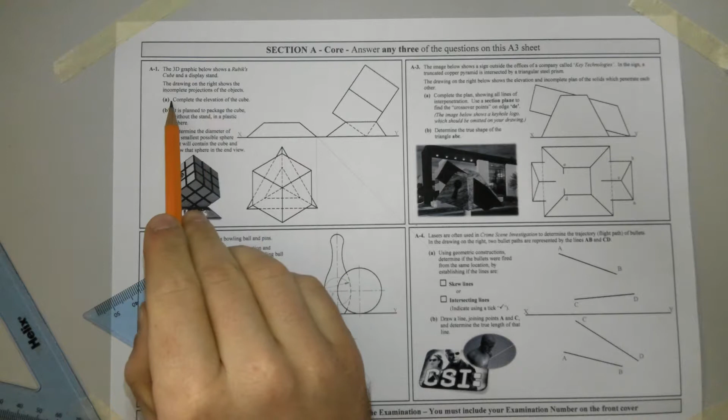So the purpose of this video is to show you how to do 2013 section A, question A1. The 3D graphic below shows the Rubik's Cube and display stand. The drawing on the right shows the incomplete projections of the objects. Part A, complete the elevation. So we've got a plan and end elevation.

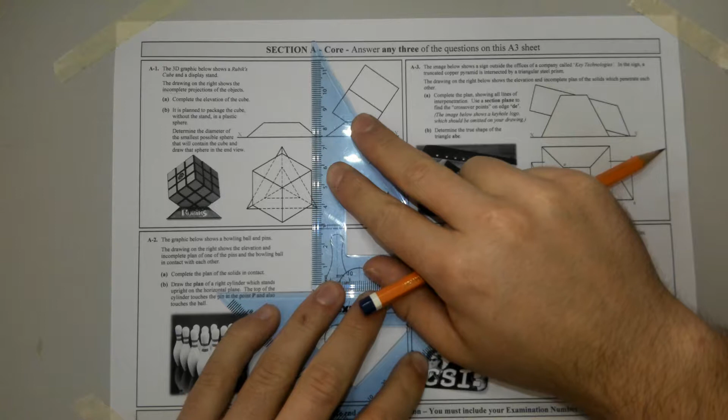Alright, so to start off, project all your lines from plan straight up, and all your lines from end elevation straight across. So we can do that now. So them all brought straight up from plan. Now I bring all the points from end elevation straight across.

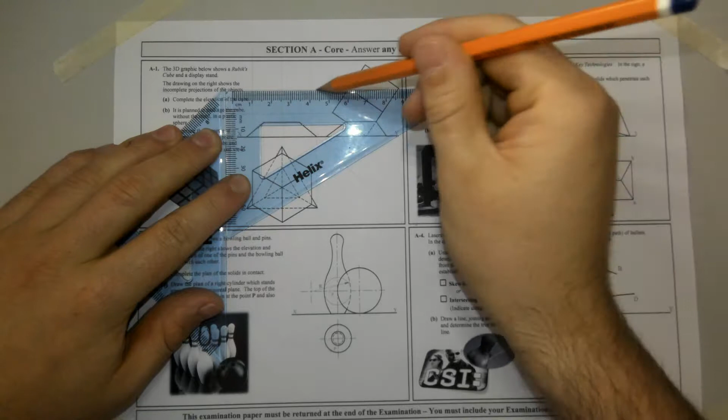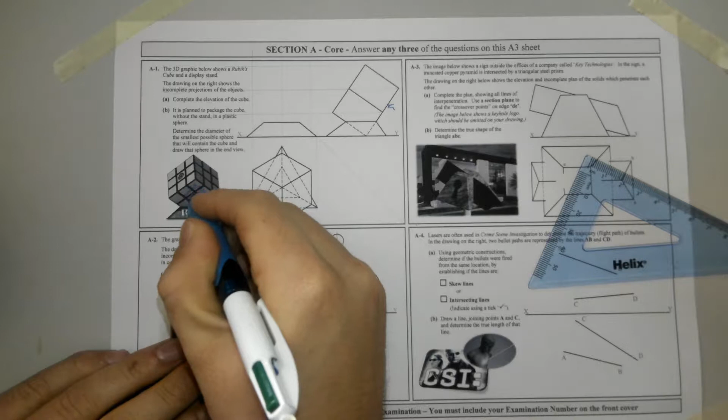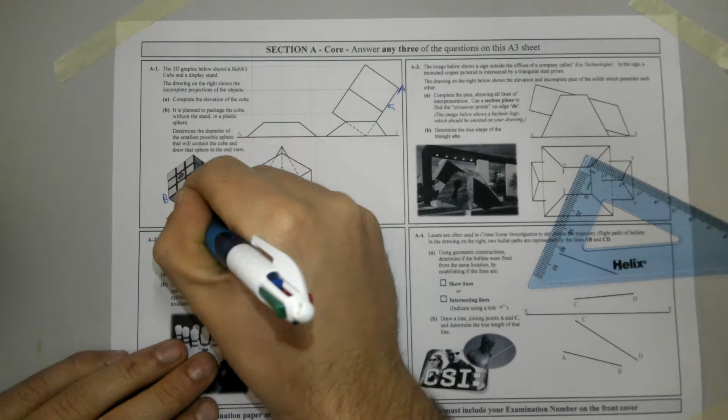Okay, so that's done. Now it's about figuring out which ones are which. So I'd use this 3D graphic to help me. That bottom face there that I hashed in blue is this bottom face here. So I'm going to call this A, D. So when you're looking in there from the left, you project it on the right, so this is the end elevation, so B, C, D.

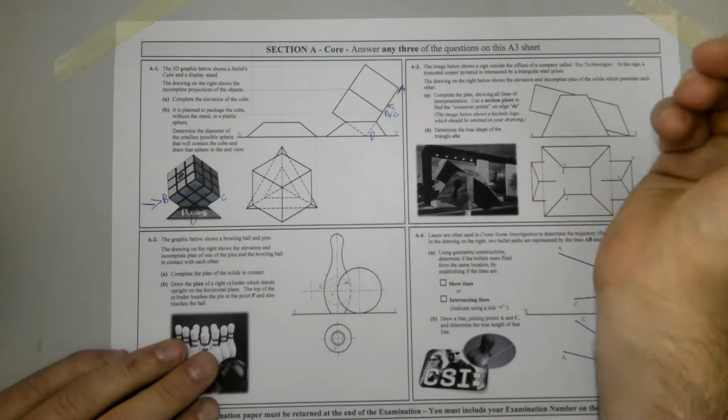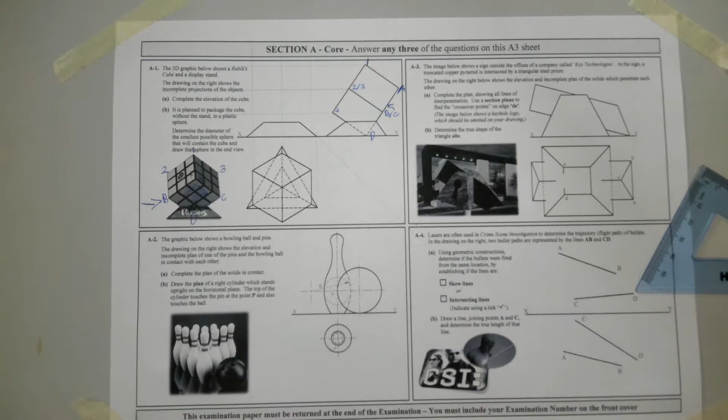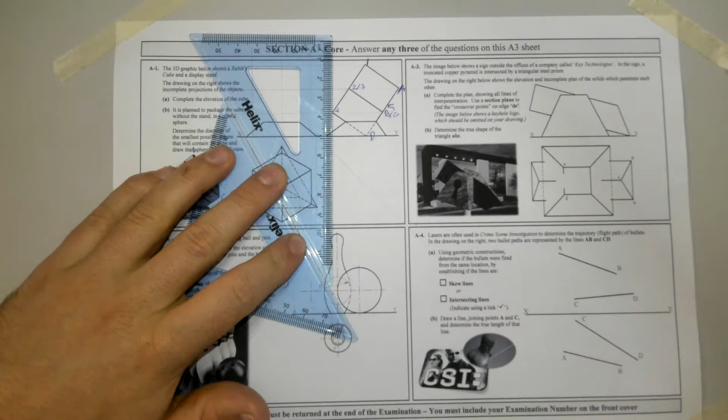And then I'm going to give these numbers 1, 2, 3 and 4. So this is 1, 2, 3 and 4. So where they are in plan view is the question. So we can drop these points down to our 45-degree line, and we can bring them across to help locate them in plan view, so we can have an idea as to where they're going to be in elevation. Right, 1 and D will be exactly in line.

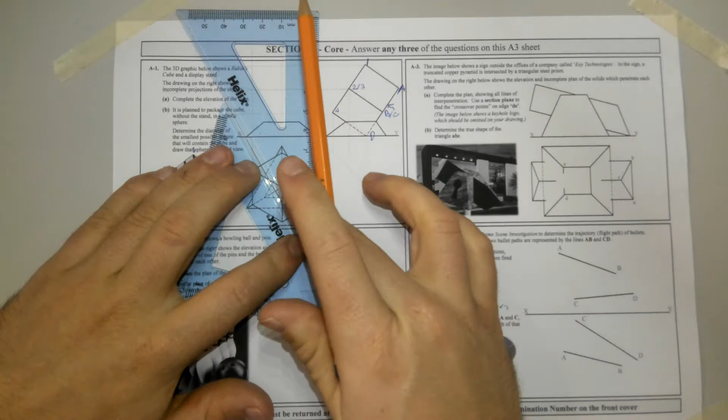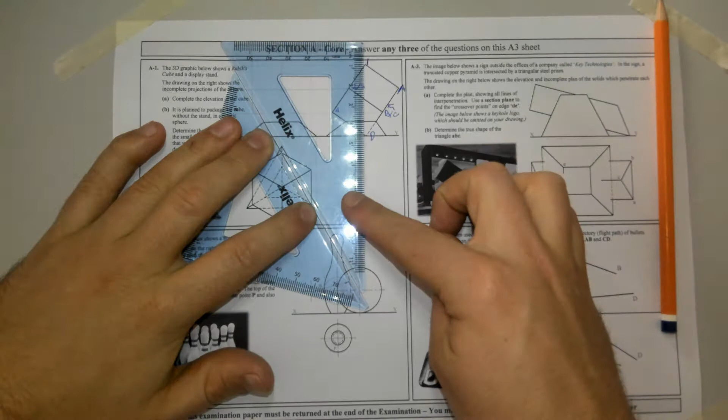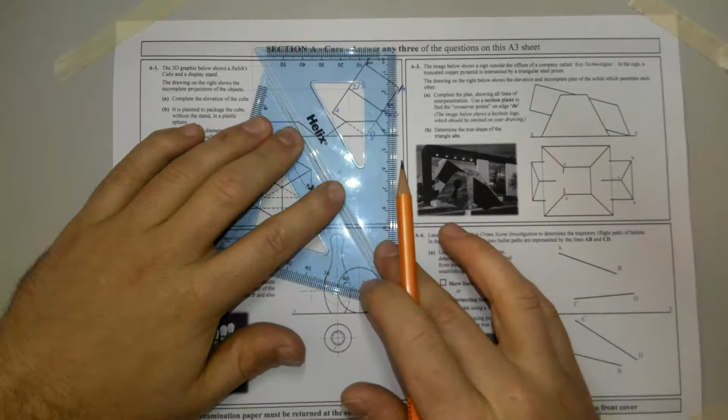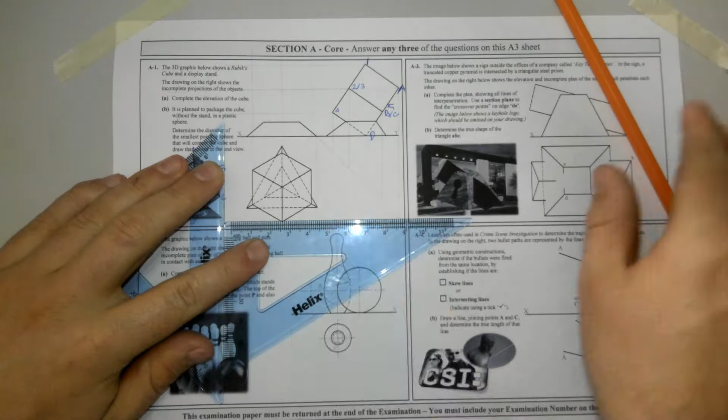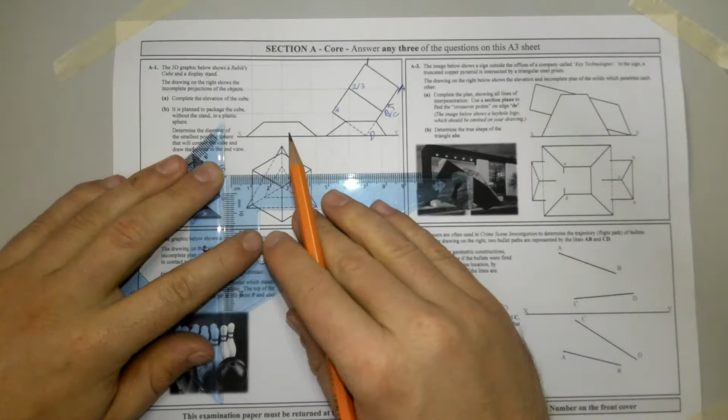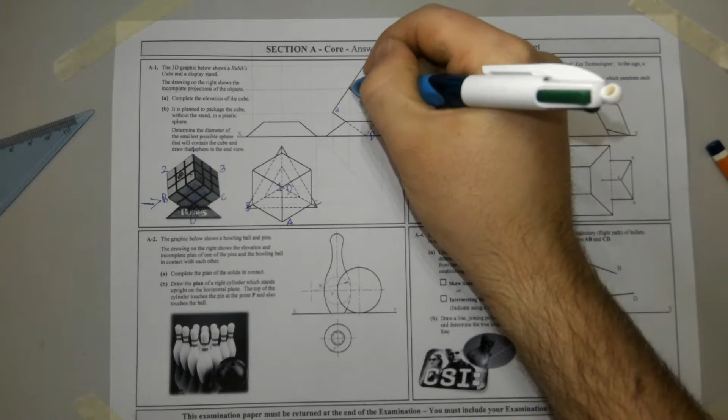So this will help us figure out where they are. Right, so this is point A, this is B, C, this is D, and then number 1 down over, so that's 1/D, then 2 and 3 is here, and number 4 is there. So if we want to figure them out in elevation, we're going to bring 1 up until it hits 1.

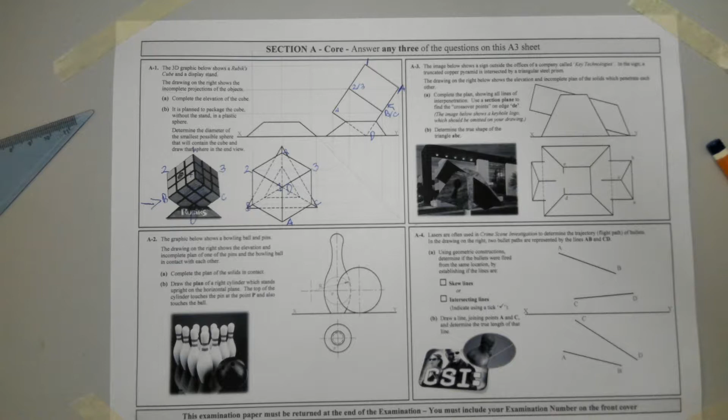Improve the focus of the visualizer.

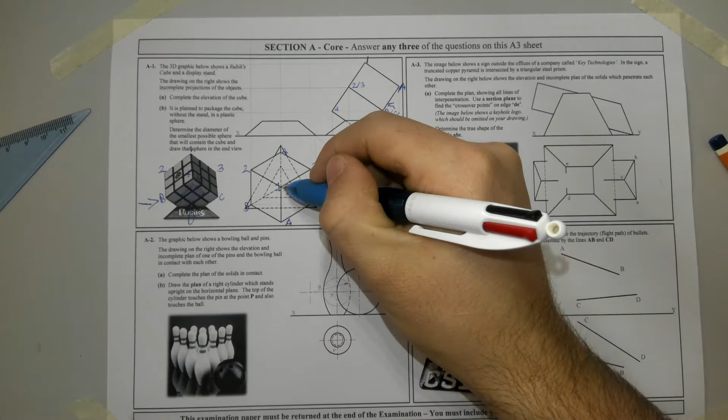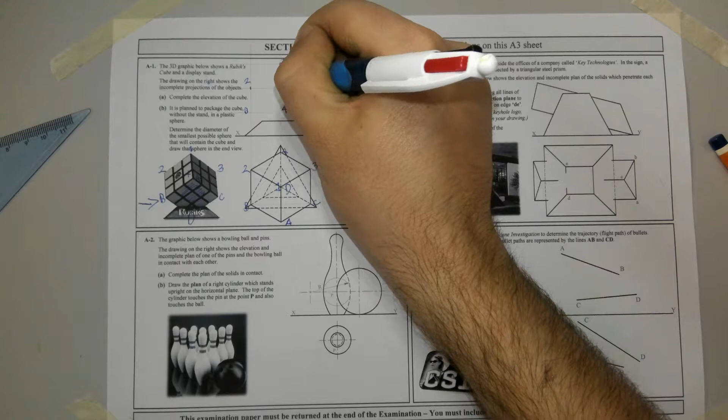So we're going to bring 1 straight up until it hits 1 going across. There's number 1. 2 up until it hits number 2 going across. Same with 3. Okay, same with B and C. B and C across until it hits B and C. And number 4. And then D. That's number 4. I've got to do A across and A up, and then D.

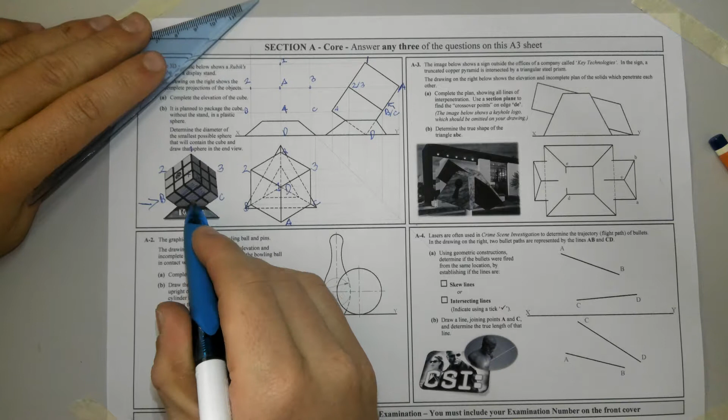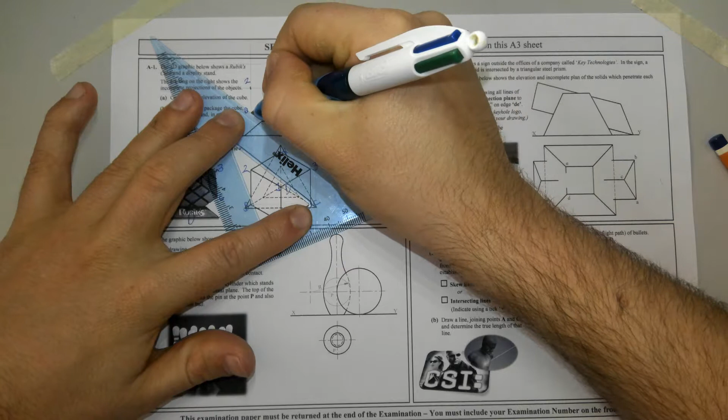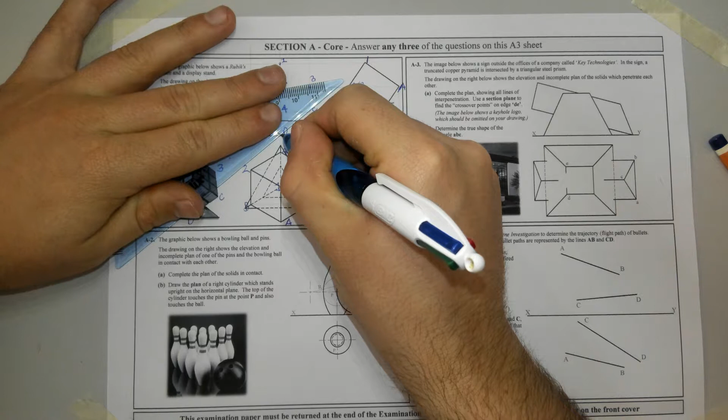Now, the letters are going to join together, the numbers are going to join together, and then numbers will join to the letters. A joins to B, so I can heavy in A to B. I'm not going to see that line, so that's going to be hidden. B joins to D. I'm only going to see a portion of that line. There'll be some hidden detail. D joins to C, which is here, so a portion of that will be hidden detail. Okay, C joins to A.

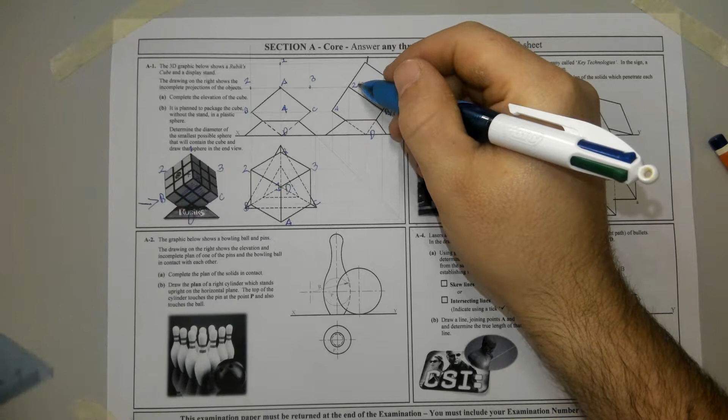Now, 1 joins to 3 and 1 joins to 2. So I'm going to join 1 to 2, 1 to 3, and now 1 joins to A, so I'm going to join 1 to A. 3 joins to C, so I'm going to join 3 to C. 2 joins to B, and I have a lot of it done now, but 2 joins to 4 and 4 joins to 3. That's inside the cube, so that's hidden detail.

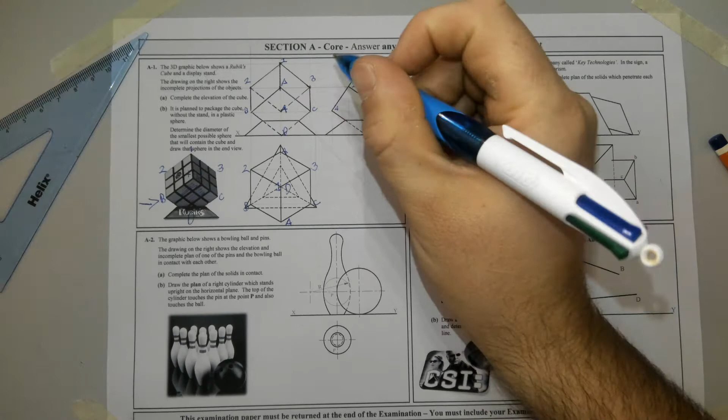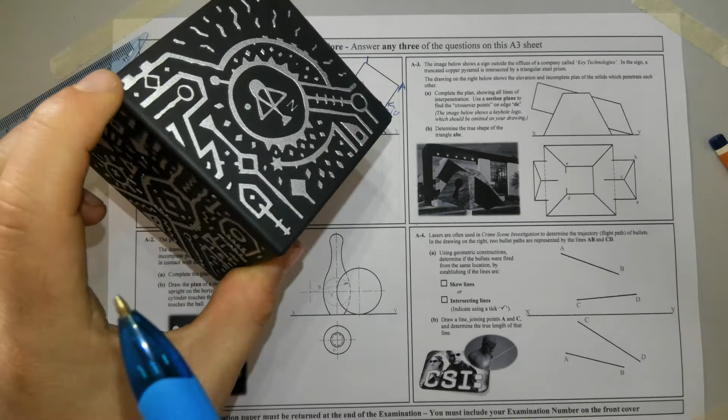And the next part of the question is determine the diameter of the smallest possible sphere that will contain the cube, and draw the sphere in the end view. Alright, now you have to find something called the long diagonal. The long diagonal is a line that joins one vertex to a vertex on the opposite side. This is an example of something that is not a long diagonal. It joins 2 vertices on the same face, so that's not a long diagonal. If I join this point to this finger here, that's a long diagonal.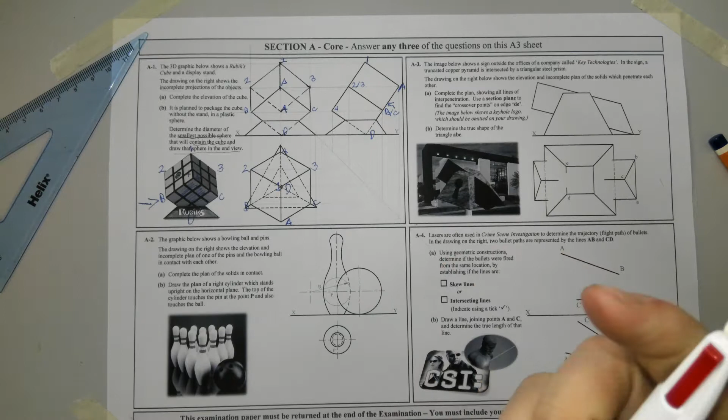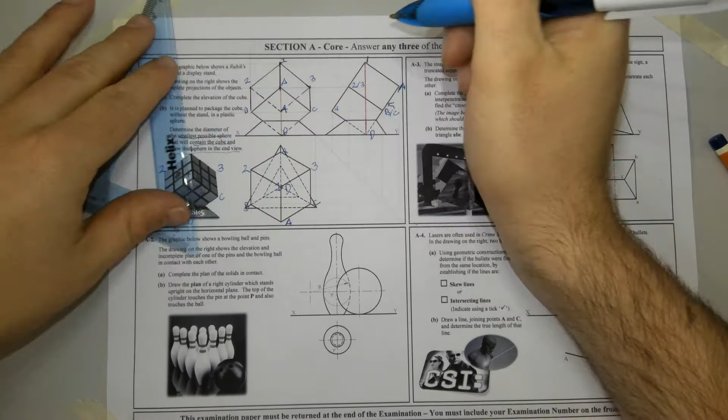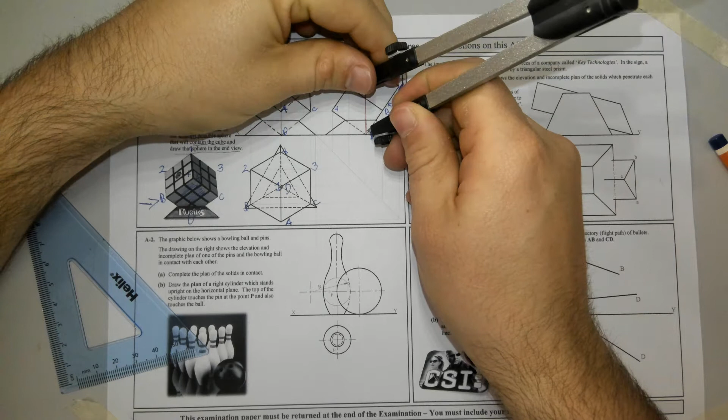Now 1D is a long diagonal and it appears as a point in plan, so that means 1D is a true length in end elevation and elevation. Okay, it's a true length. So if you're going to draw the sphere, you have to see the long diagonal as a true length. And here we have it there. Now you can bisect that long diagonal, so I'll just get my compass. So you can bisect that there.

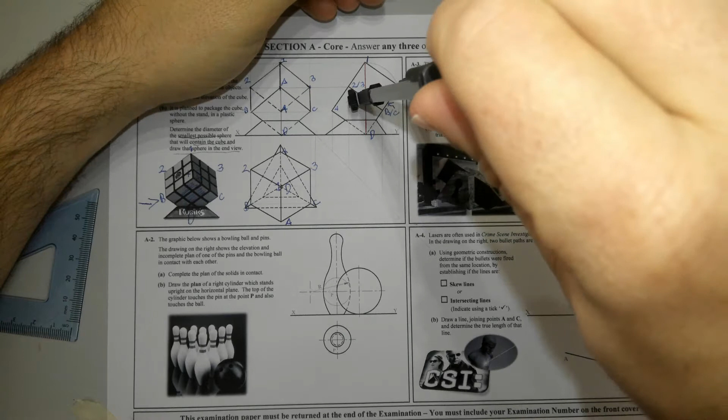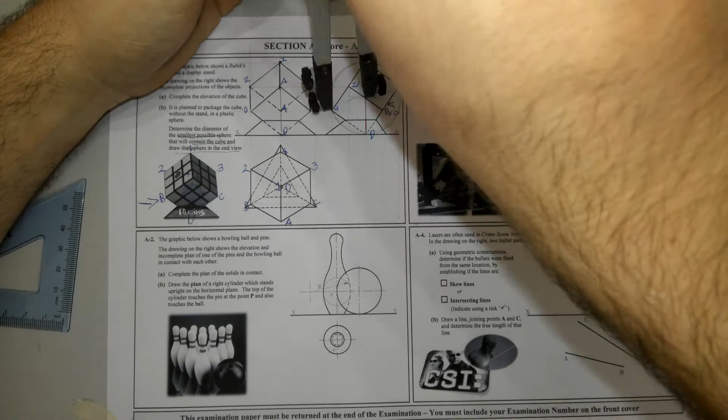Join them together, and now you put your compass on your center point, bring it to the points outside, and there's a little bit of compass slip there, accuracy wise. There it is there. So there's the sphere in the end view. It just says draw the sphere in the end view. If you want to put it into the other ones, center point remains the same, radius remains the same. It doesn't have to touch all the points in the different views.

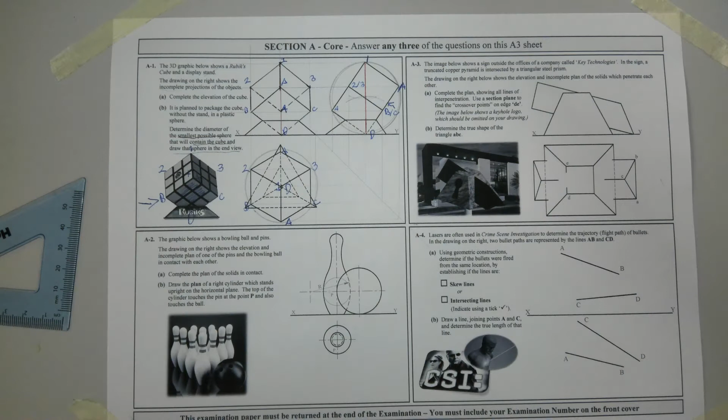So there's the plan view of it. The elevation, it's just directly across. Again, radius remains the same.